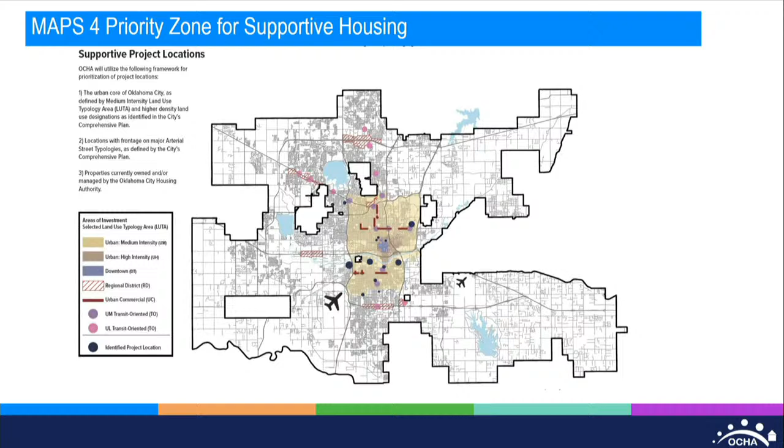And this just shows you right now the current projects: Creston Park, where we're allocating money, Vita Nova, permanent supportive housing project, and then Oak Grove. You can see how we're dispersing the MAPS investments across the community. And I'll keep filling this in as the projects go forward.

And here's a little bit more detail on Vita Nova. There's 75 units there, but it will create more than 75 beds, so more than 75 people will be living there that were previously chronically homeless. So that's why I'm just putting that 85 there, as an estimate.

We did use $3 million of the MAPS funding, as I said before. We expect to leverage back at least $6 million in other sources, and the budget right now is still being fine-tuned, but we're estimating that Phase 1 will be about a $9 million budget, could be $10 million, and that the MAPS funding will represent about 33% of the total development cost of that one first permanent supportive housing project, or about $40,000 a unit on investment.

And we are trying to start the construction before the end of this year. The big news here is that through our RFQ to create a vendor pool, we have selected and engaged Script Architecture. Script and Open Design Collective applied to our vendor pool. They submitted an RFQ, and so we selected them as the architects, and they're engaging Wallace Engineering to be the engineers on the site.

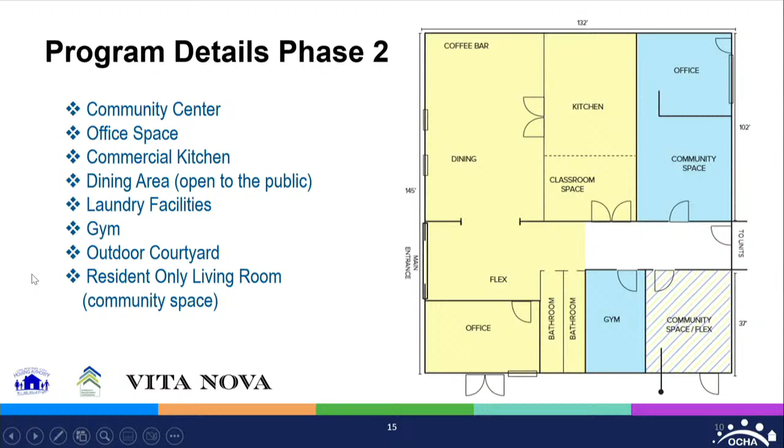Now, some detail on Creston Park. There were previously 159 units, but we intend to come back with about 558 units of mixed income along Martin Luther King between 26th, 27th, 28th, and 29th Streets. Phase 1 will focus on 28th and 29th Streets. We received $1.25 million in GOLT financing, and with our consulting team from Baker Tilly, we're convening the architects and engineering firms, and putting out an RFP for a general contractor in the next week or two for this project to oversee that.

We're going through budget revisions right now because some of the numbers were kind of stale from a couple of years ago, so we're estimating we have about a $2 million gap there right now, and $2.5 million of MAPS for homelessness money will be used in Phase 1 of this project, which will create 170 units. That's just Phase 1, and I'll advise on the other two phases as we keep advancing on this project.

The other place we're investing the money is at Oak Grove Apartments, which is a public housing location right now. We're committing $1 million of MAPS funding there. We're going to use HUD tools called the Rental Assistance Demonstration Program and Section 18 to convert this from public housing to affordable housing. There's 288 units there right now.

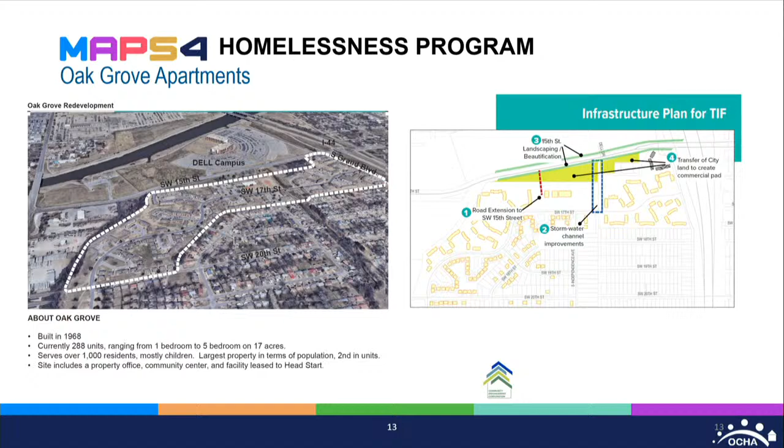And there's over 1,000 residents at this location, just to give you the scale of what we're talking about, and many, many children live at this site. There's also a Head Start facility, which is part of the plan.

So that was just a brief overview, but I'm happy to take any questions about any of it if you have any. Questions? I have a question.

Okay, so at Oak Grove specifically, the plan is that we will be able to help people relocate within the site as it goes through different phases. There are so many buildings there that we'll be able to have a building vacant and move people in, and we pay for all of this. The residents do not pay for any of it, and they're already being advised of the plan as it's in process. We've had resident meetings informing them of their rights and what our plan is, and we will continue to have those meetings. They will be relocated within the site as construction continues, and then they will have the choice to go back to the unit they were in, or they can stay in the unit they're relocated to.

Or then they even have the chance to relocate off-site permanently if they want to. They have the power, and they make the decisions in this, and we're informing them of their rights every step of the way. But we hope that they all stay and that they're the beneficiaries of the new development, and that's what we're informing them.

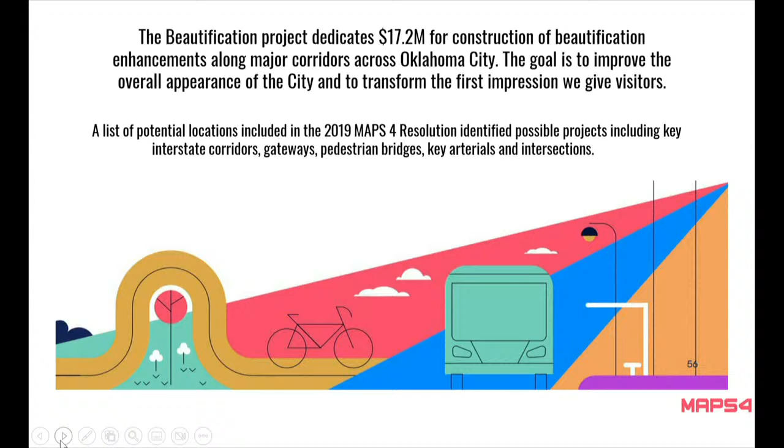The proposed locations follow along with City Council's resolution of the locations for beautification. Item 2 is a corridor type project, and we've chosen 2 locations underneath that corridor for beautification improvements under some highly used bridges.

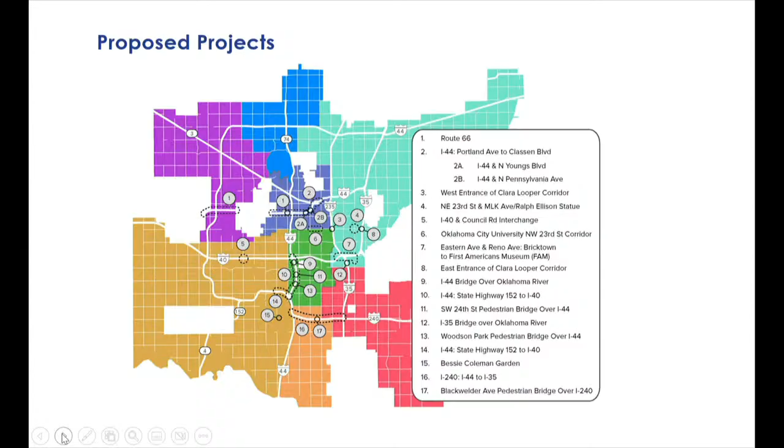So briefly, we started off with an engagement process to go to the public and ask them about beautification across the city. We had a survey that was out there for a couple months. We received 3,500 plus individual responses to that survey. We attended 10 different community events.

We held focus groups. We met with 3 different kinds of groups, and we had 24 different civic organizations involved in those focus groups. We also met with ODOT separately and with planning staff, public works staff, and then obviously MAPS staff to go over all of the engagement and get input from everybody.

Just a brief highlight — we have a much deeper engagement report that we've presented to the subcommittee before, but we did find a few things across the wards in the survey that kind of match for everybody. People want community anchors, they want neighborhood identification, they want to support tourism and economic development, and then they want to bring a sense of playfulness and delight to everyday spaces.

Also, we asked for 3 words from every survey response: what is your vision for Oklahoma City of the future? Walkability, safety, and green, diverse, and inclusive were the top across the board. So we used that to shape how the master plan elements would come together.

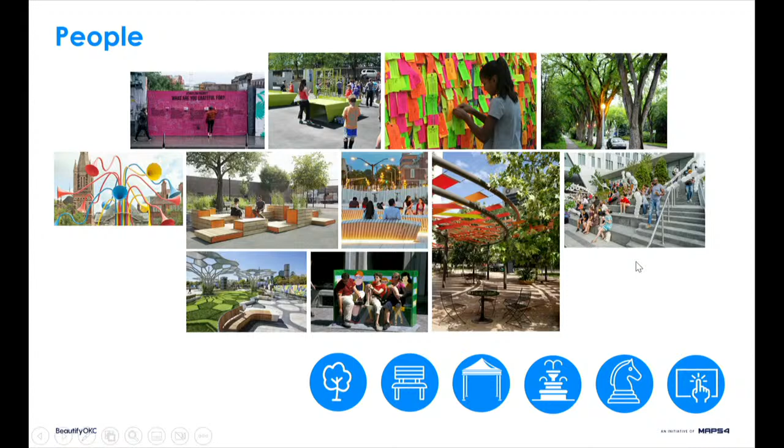So you'll see a lot of different options here, from something that is temporary and playful, to something that's more permanent. And within the master plan, you're also going to see examples of local applications of beautification that we've identified and that were identified in that engagement process, but also showing examples from peer cities or places that might introduce new ideas to Oklahoma City.

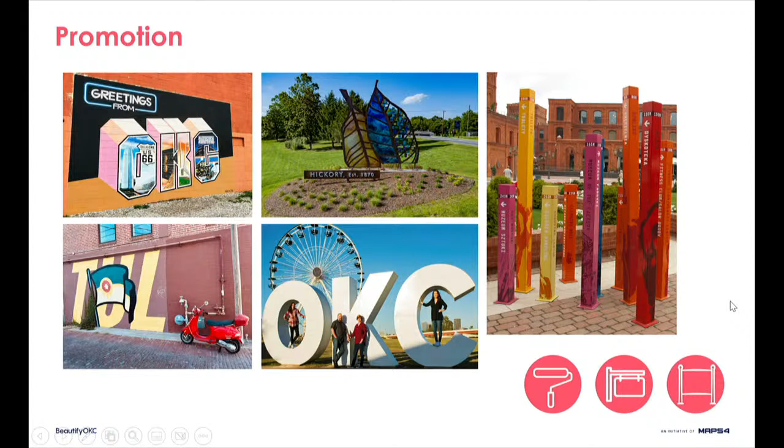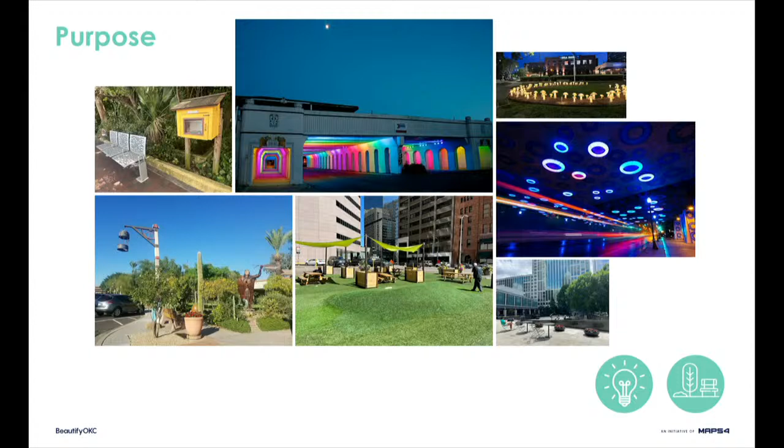So for purpose, looking at this is going to be something that has meaning and actually has intent behind it. So it isn't necessarily just going to be creative lighting. It might be creative lighting with the intent of safety, or seating and shade structure with the intent of providing new space where there might not have been existing community space.

And then sustainable, I think this was a really big one that came out of that engagement, is looking at green infrastructure, but also thinking about that long-term process of maintaining it, and really looking at what materials, what plants, and things like that can be used to make sure that this is maintained but still has a level of ownership and pride from the community.

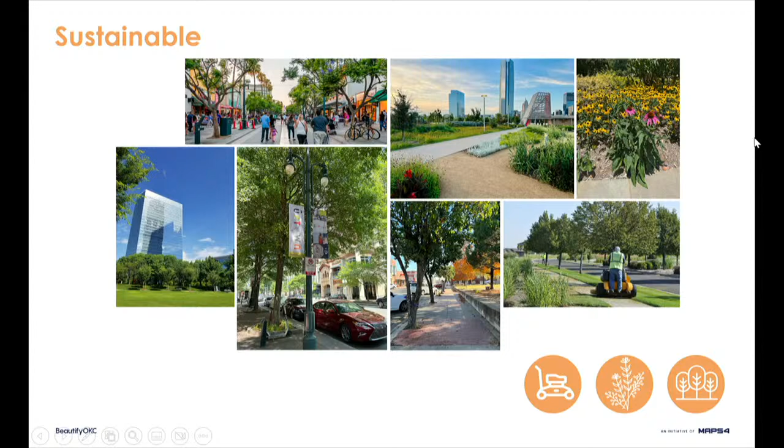And then connections. I think this is an interesting one because it could be interpreted differently. But here we're looking at not necessarily a connection in the sense of building a new trail, but how can we improve upon our pedestrian paths on our existing trails and make those safer and a better experience for the community as well as those visitors.

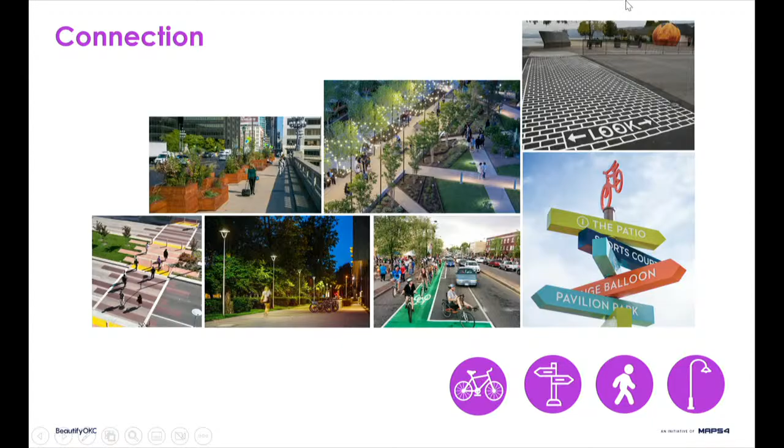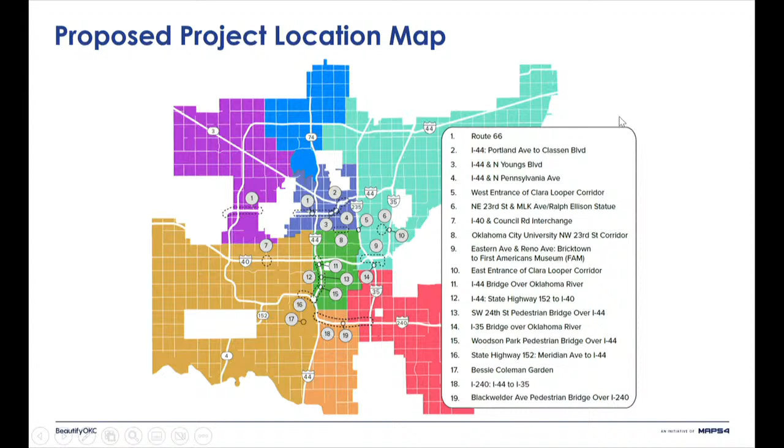So from here, we're going to start going into the proposed projects. So to give you that quick overview map of each of the projects, and then going into the drafted budget that we've produced, you'll see that phase one consisted of the land acquisition, but then also the development of the master plan. And for the budget, we really took into consideration those high, medium, and low applications, trying to find common ground as far as elements and the costs related to them. And so for each of these potential projects, we started to really look at the overall impact and possible applications and materials that would be needed to make sure it is a successful project.

So I'm going to go over quickly some of the projects in phase three. These will be some of the ones that you'll see first. One was the 3 pedestrian bridges that cross over the interstate. I think everyone is probably somewhat familiar with these, probably more so as a gateway that they drive under than a pedestrian trail. But while these aren't necessarily the most attractive pieces of infrastructure in our city, they are really critical and important to the neighborhoods they serve. These are important connections to community assets and public transit, and I think they're deserving of a better treatment, as well as increasing safety, while also giving visitors and those driving on the interstate something visually appealing to see rather than passing under it and hoping your car is going to be okay.

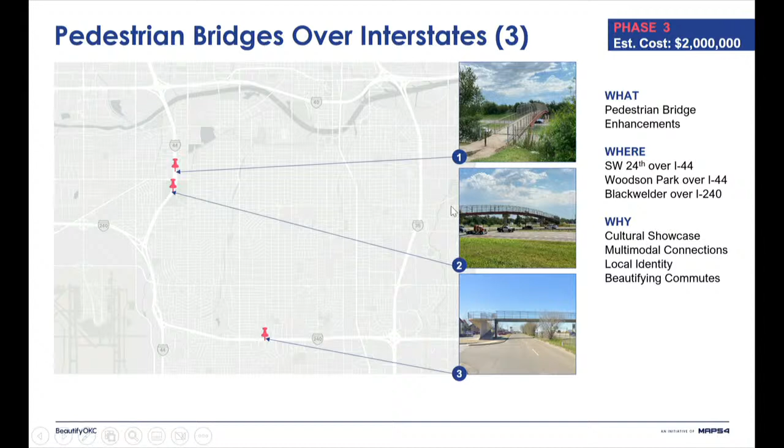All right, so here's pedestrian bridge number 1. Interesting tidbit is that this is very close to the Oak Grove location we just discussed a few minutes ago, so right near Rockwood Elementary. But for each of the projects and how they'll be shown within that master plan document we'll bring before you, you'll see that it's going to show the elements we desire to see within that project. It'll show a case study and certain examples, but we are not ultimately saying this is the piece of art, these are the trees, this is exactly where this needs to go. We are setting a precedent and identifying the stakeholders and parties that will be involved in that next phase of design. So we're providing imagery, examples, and ideas that will help set up the MAPS office for those RFQs and RFPs in order to make sure they have a clear process for moving forward and soliciting those designs.

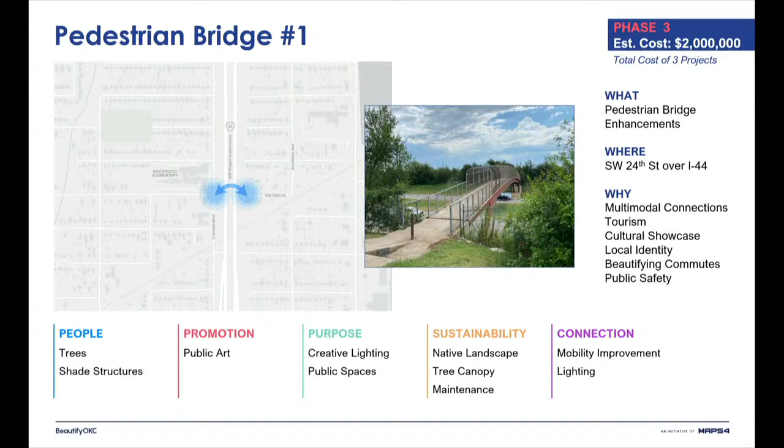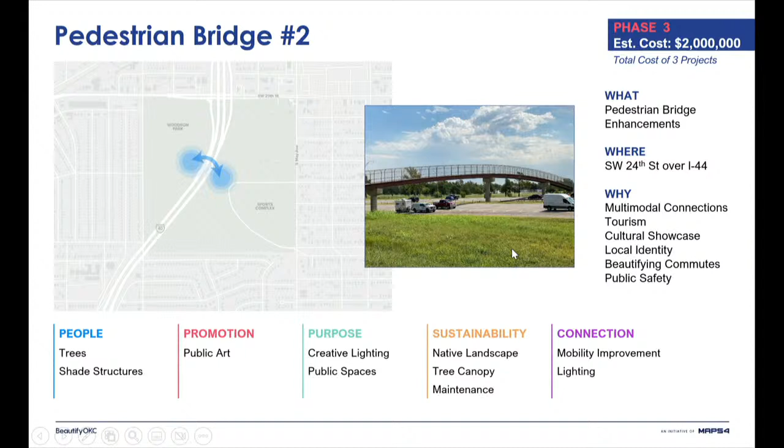So then pedestrian bridge number 2, you can see very similarly, there might be slightly different elements suggested in each location dependent on the context. But for each of these pedestrian bridges, they're going to be pretty similar because they're designed similarly. And then here's that third one. And to give one more overview of those examples, showing here that high, medium, and low application of beautification. This top right one is just yarn, so it's what we call yarn bombing. It's a common practice that allows artists to come and create a textile experience.

It is a lot more temporary, but this bottom left is actually plastic pieces adhered to an existing fence—slightly more permanent, but also a very cost-effective application to existing infrastructure. This final one includes some green infrastructure, requiring more updating and more cost. But those are things we want to provide as examples in the master plan, to provide ideas without limiting how this project will actually be implemented.

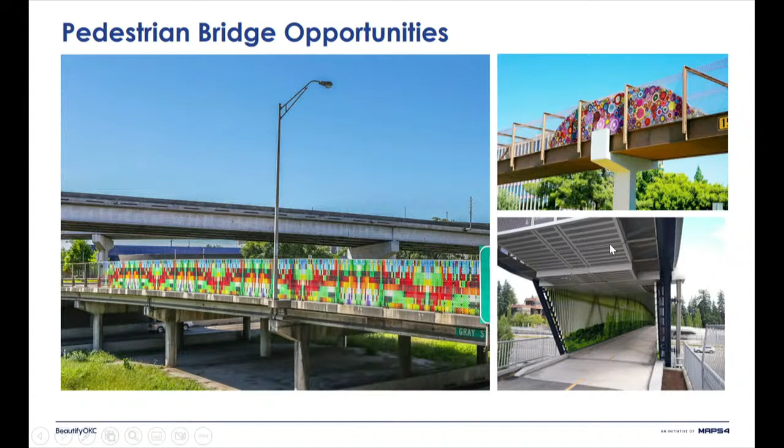Another one we're looking at is the Reno corridor, which is going to be a really important corridor in the next few years. An interesting thing here is that it's going to be essentially a gateway, but also currently connects some existing assets—we have Bricktown, and now the FAM. Knowing that in coming years with the Olympic trials potentially, that's going to be an exit a lot of people will be taking, it's an awesome opportunity to think about how we're welcoming people into that area.

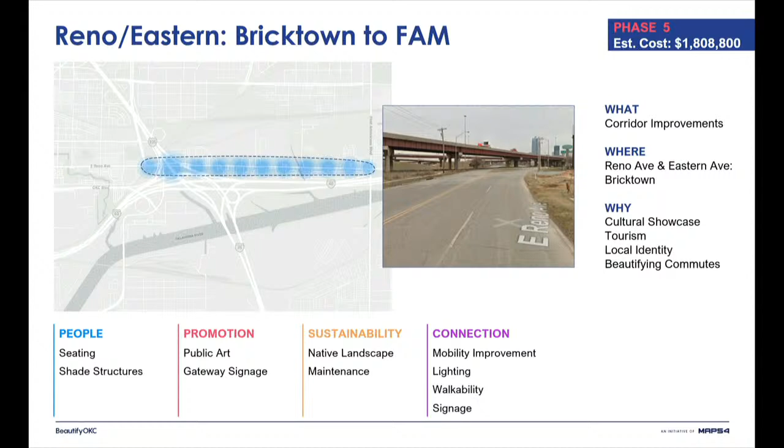This is one too where we've talked with ODOT, because a lot of this is ODOT right of way. We've set a precedent with them about the things we want to see in certain areas and within their right of way, setting up the relationship so that in design phases they won't be blindsided by what's put in front of them. It's something they expect and are willing to work with us on—a relationship we really worked on within this plan. You can see here opportunities for this corridor, with high, medium, and low applications.

One is a more costly art installation that incorporates light, improving safety for pedestrians but also providing a landmark—something visually stimulating. Bottom right corner is cast painted concrete; the materials are a little lower cost, but when paired with other elements it can still make a pretty impactful statement. This top right one is a low cost application—paint and lights. It doesn't take much, but ultimately we want to inspire these projects to include people and residents, and think about how they meet all of those principles.

We've also provided maps with something they can internally use to make sure those projects are meeting residents' expectations.

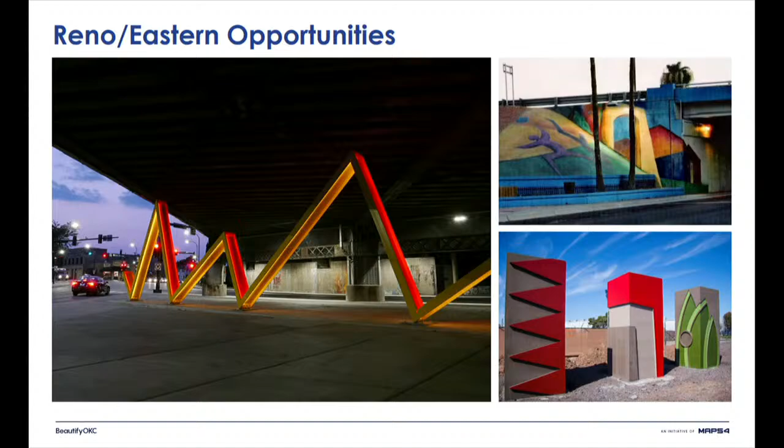Hello, thank you for your presentation. I'm really excited to see all of this—it's kind of in the brain space that I live in. We've got an Uptown 23rd Streetscape coming down the way, so seeing these visual inspirations is really awesome.

Thank you. You mentioned earlier about peer cities—are there any specific peer cities you've looked at that you've pulled these ideas from that you'd like to share with us?

I think one included in there—maybe this is coming to mind because I put it in—is Cincinnati, a common one that gets brought up. It's really interesting; they've done a great job using their historic districts to catapult urban development, improving some less desired areas in tactful, low-cost ways. Another one is the Indianapolis Cultural Trail, looking at how beautification along a bike trail can actually improve economic development of a distressed area. There's a lot more, but those are the two I can think of.

I would add that Oklahoma City, because we're becoming such a destination for public art, is actually using our own examples now. And to borrow from Spinal Tap, we're taking it to 11 on how much public art we might want and how much more opportunity there is.

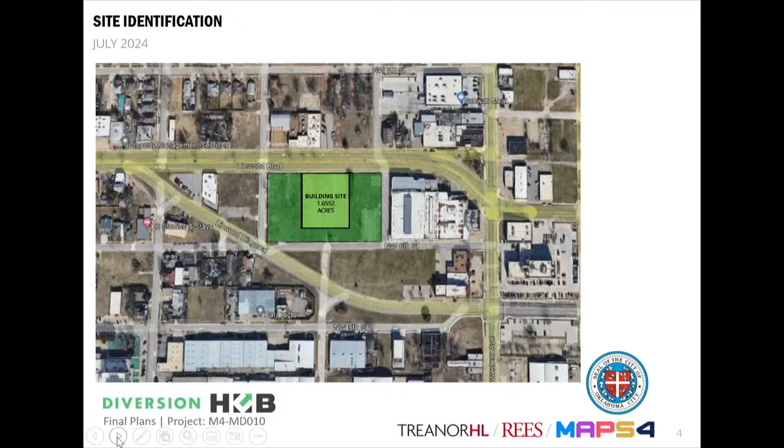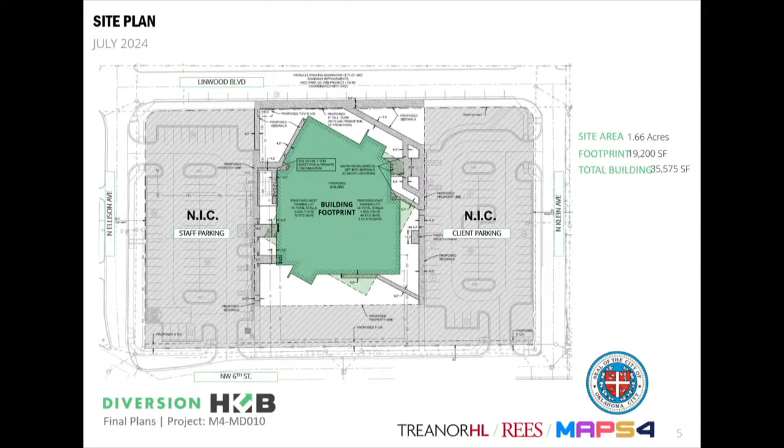So a little closer in here on the site plan, you can see the building footprint, and the white area around it is the immediate site area that will be a part of the MAPS 4 diversion project. So all the sidewalks and connections directly off the building are encompassed in that. And then, as I said before, you kind of see the U-shaped site around there, which includes the parking lot and some additional sidewalks and access to the site. That will be part of the project, but it will be funded by Diversion Hub and Arnall Community Funds rather than the MAPS funding, so it is just designated in that way on the plans.

And then we have a couple of the floor plans here today, and again, for the previous board members, the program spaces, the floor plan spaces have not changed. We're still providing a large welcoming lobby, which was very important to the Diversion Hub. The central spine core area there is for client meetings and some small training spaces. We also have some behavioral health spaces situated directly off of the client spaces. There are some alternative court spaces located on the ground floor, some larger training spaces which can be utilized by Diversion Hub or their partner resources for continued training and education. And the west side of the building has some of their donation, storage, and collection spaces, as well as a small laundry space. But I think the takeaway is this ground floor is all client-focused spaces.

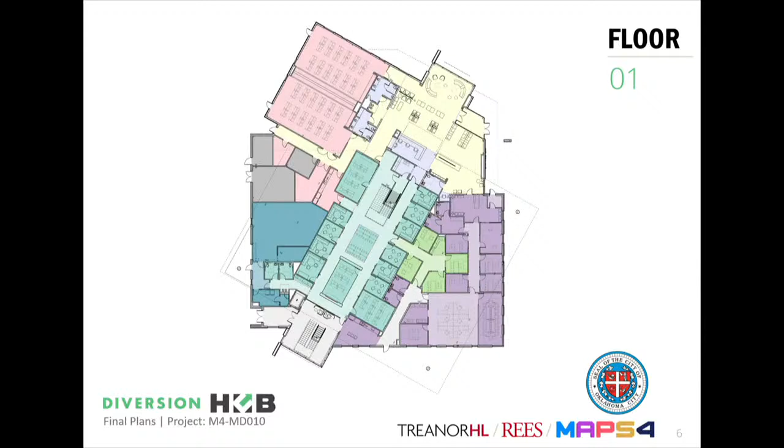And the second floor is the supporting staff and administration spaces. So we have offices, we have break rooms, and some additional conference rooms that will be dedicated for the staff and the partners to use.

One thing to note here is the angled spine in the building, and there is an open connecting stair. Diversion Hub acknowledged the need to separate some of the staff from the client spaces, but they want a strong connection to all of the client spaces. So it is an open stair. It is secure, but visually open to allow more connection with the client spaces downstairs, to see how busy it is and the activity, and to help keep a stronger connection between the staff and client spaces.

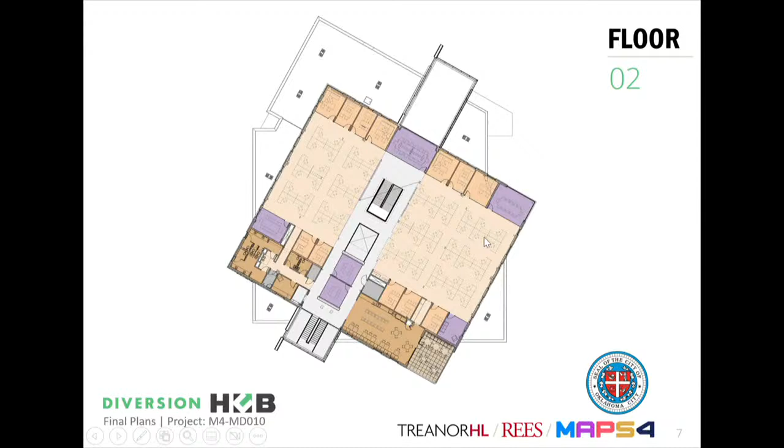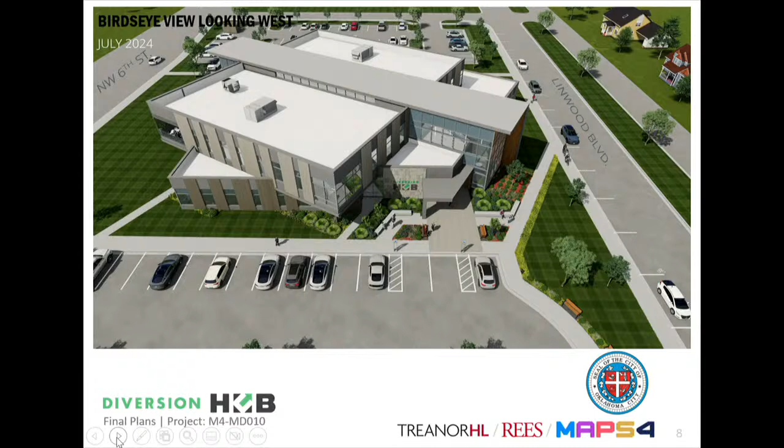For final steps, we have issued the construction documents and the project manual specifications to MAPS. We are going through the approval process with the public entities. The goal is for the documents to be put out to bid next week after the city council meeting. Behind the scenes, we are conducting furniture coordination with the diversion hub. That portion will not be funded by MAPS funding, but it's a piece we're working on. The public art piece is another item we've been working through, and my understanding is the artists have been selected for that.

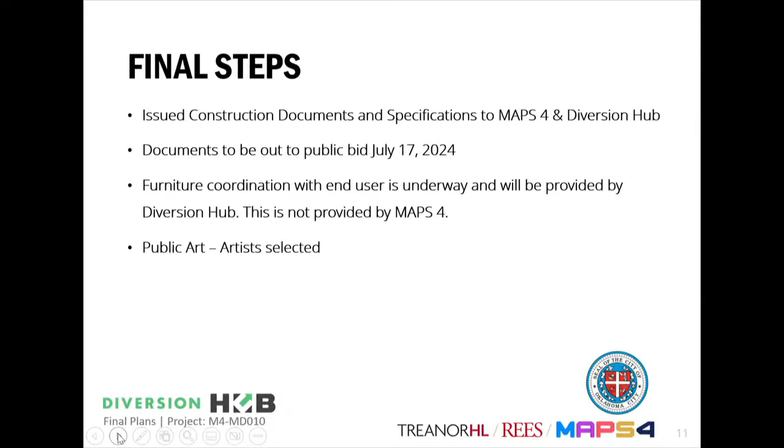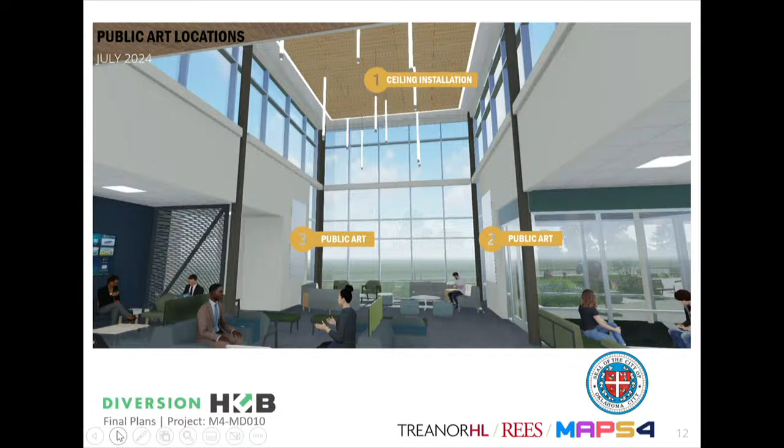Just a few interior views here: an interior view of the main lobby, and we've highlighted the location. There will be some public art located on the walls of the lobby space, and there'll be an art ceiling element in the lobby as well. One of the things Diversion Hub also wanted to prioritize was making sure it was a welcoming and comfortable space for their clients, so we worked to really open up this space and provide a lot of natural light.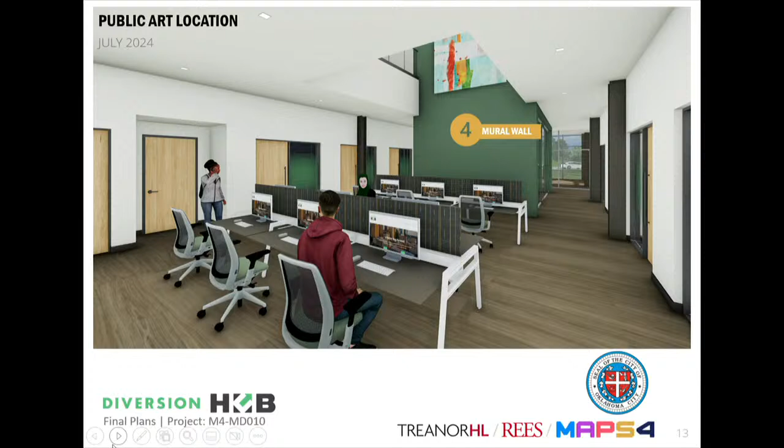As far as next steps go, we are hoping for approval today and working towards approval with City Council next week. The plans go out to bid next week. We would be conducting a pre-bid meeting in July, towards the end of July. We would be collecting bids early in August, with the intent to select and award the contract to a contractor in August and get construction underway in September of this year.

As far as the budget goes, the $13,023,400 listed is the MAPS portion dedicated for construction. There was also $1 million allocated for land acquisition. The land was acquired through Diversion Hub and the Arnall Community Funds, so that $1 million has now been put into our construction budget to use. So you see the total there.

That's $14,023,400. We received updated cost estimates as far as splitting the building and site piece, so our current construction estimate is coming in at $13,947,000 and some change. MAPS has also sent some funds to OG&E to start some utility relocations on the site, so that's accounted for there as well.

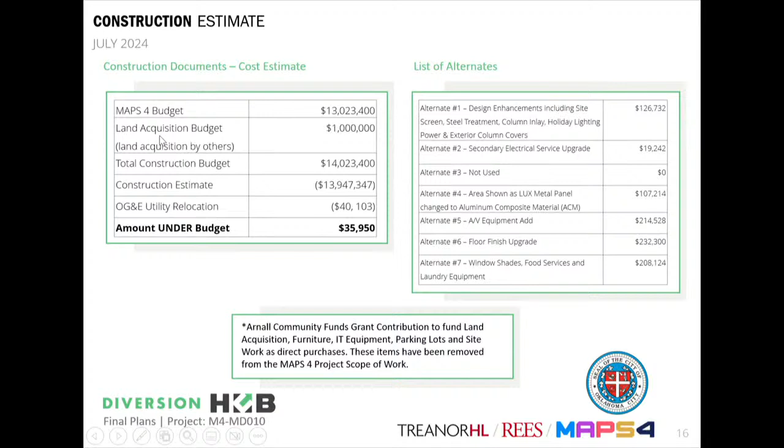Okay, that is the end of the presentation. Thank you so much. Any questions? This looks great, ready to get rolling. Yeah, we're excited. Nothing? None? Okay, thank you so much.

So we need a motion and a second to approve the final plans and specs. Please cast your votes. Okay, the motion passes. Thank you.

David, do you want to, for these next three items, explain kind of what all of these three do, and then we can just knock them out?

Okay, I can. So the next items are related to the diversion hub. Item H is the lease and management agreement. This is typical, like we did for the wellness centers with MAPS 3. Anytime we have an operator, we have an agreement like this, and it sets out how we will repair certain things, and they're responsible for day-to-day items and all of that. It's basically a lease agreement.

Then item I is the real estate donation agreement. So the diversion hub of Oklahoma County is donating that land immediately around the building. If you saw on that site plan, you saw NIC, not in contract. They are keeping the parking lot areas.

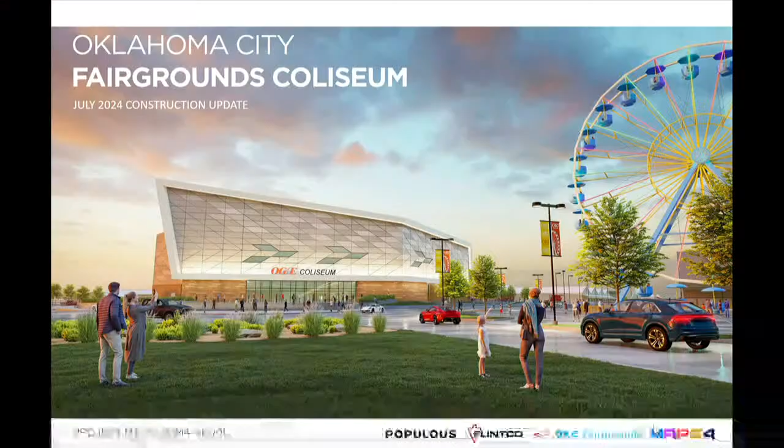Good morning, Madam Chairwoman and board members. Pleasure to be here. As David mentioned, it is a very good change order. We continue a stream of those. I wanted to really quickly give you an update on our project construction status out at Fair Park. We are moving along really rapidly now that we've had some good dry weather. We did have quite a bit of rain back in April and May.

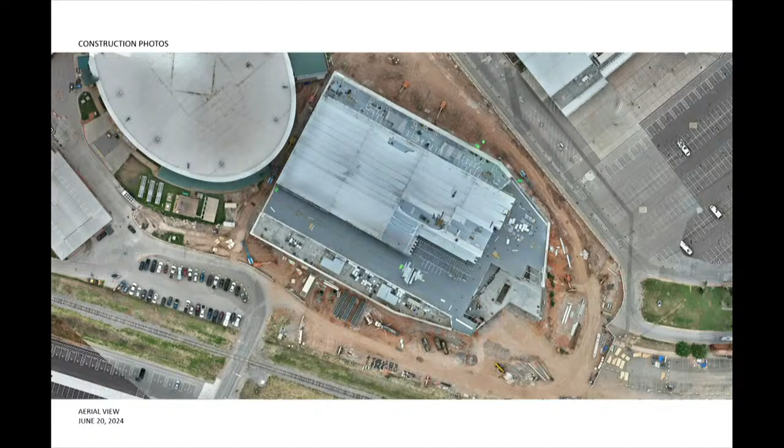Most of the roofing is now complete. We are looking at it from Gordon Cooper, and this is from driving in from May Avenue.

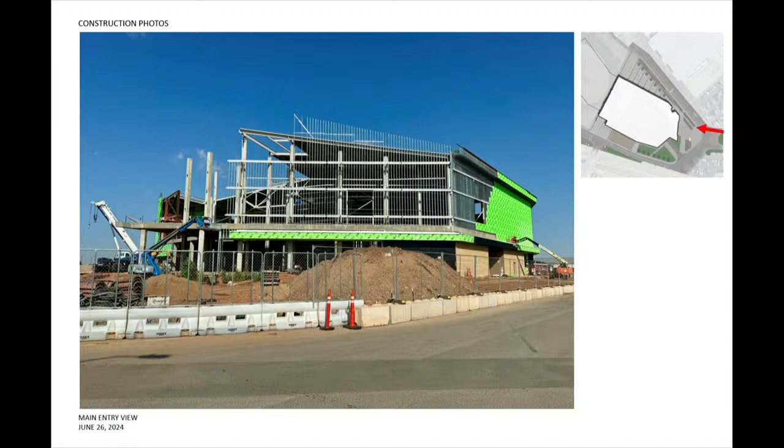We are about to begin the completion of all the major exterior steel work. We'll close in the walkout area where we've backed out our construction equipment, close in the front, finish the roof, and begin drying in the remainder of the building by the middle of August.

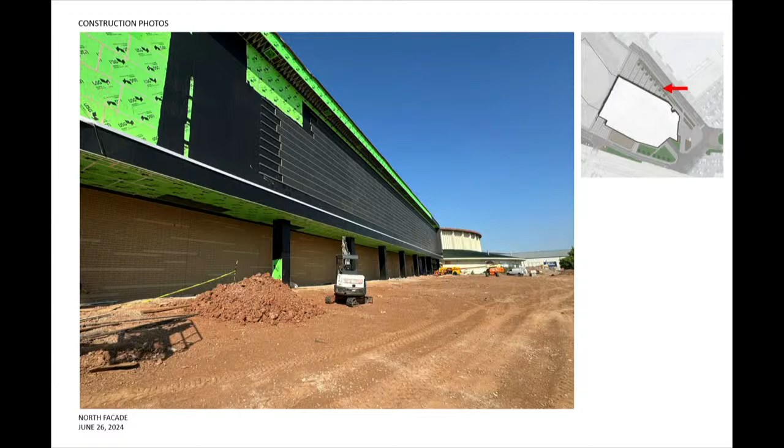This is along Gordon Cooper. You can see some of the exterior waterproofing and insulation in final installation. As we go around the building towards the view from I-44, you can see our phenolic panels, that exterior weather barrier rain screen going up.

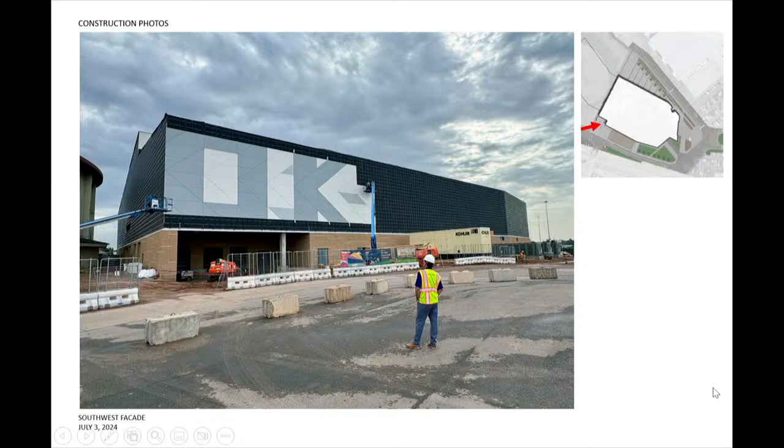On this side, it's going to have a giant OKC that you can see all the way from the highway. Flintco is moving along really rapidly on the exterior envelope, and we anticipate that by mid-August the building will be dried in and we'll be primarily working on the interior.

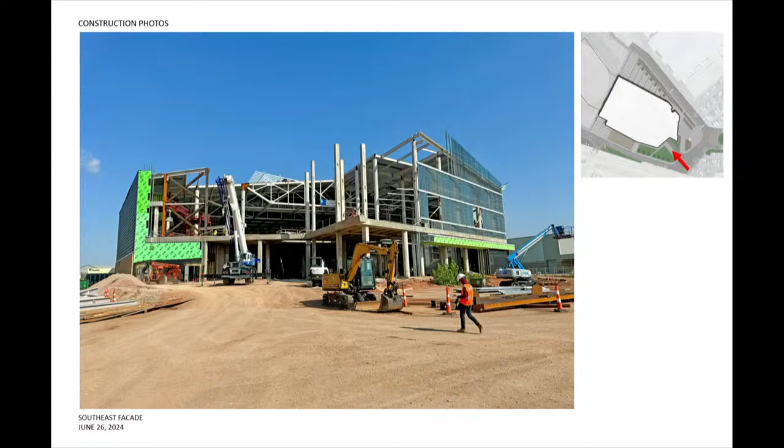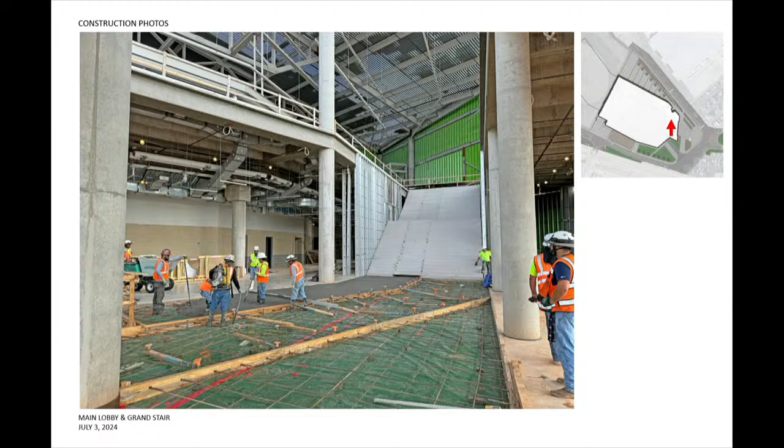That shot is from the front entry where we're going to finish the steel work over the next couple of weeks. We were out on July 3rd when they were completing the last couple of interior slab pours, so almost all the interior floors, or at least the bases, are in. They'll begin working on their more detailed finishes once we get dried in.

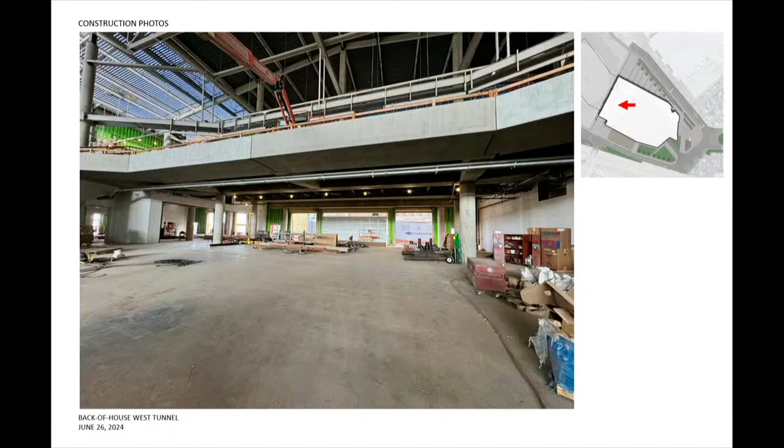Some of these areas are really remarkable, huge areas that enable our building to do things others just can't do, and underneath the opposite seating bowl where we're going to have animal return lanes and circulation. The upper concourse area has the grand stair that you can see below.

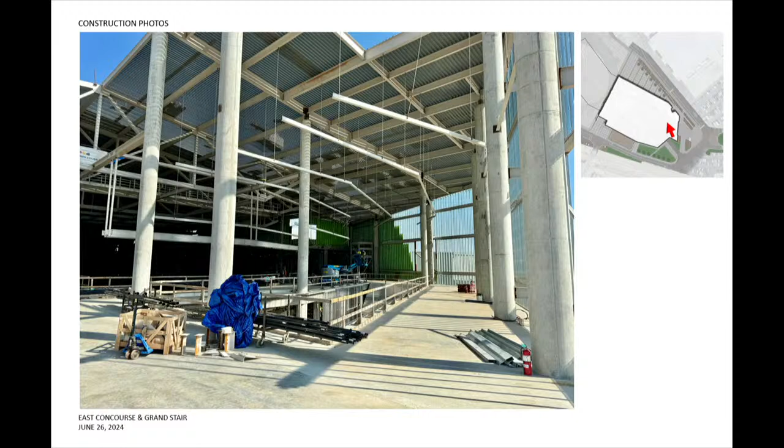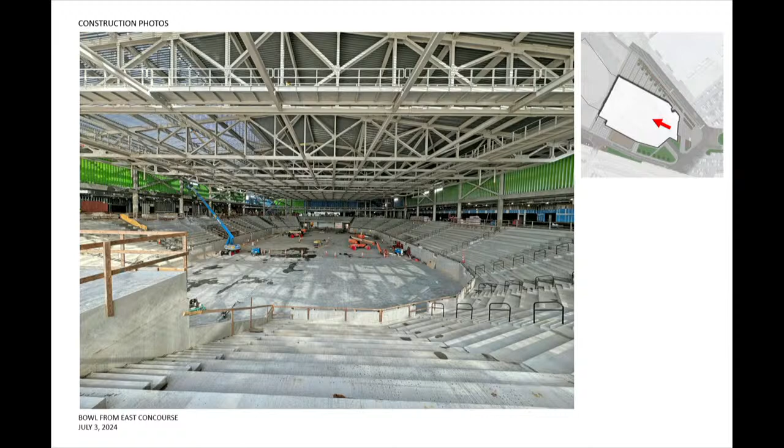They're starting to get supporting infrastructure in for some of our wood ceilings and feature areas in that concourse. The bowl, when we were out there last week, they had completed almost all of the interior railing, so they're sailing along really quickly. They're beginning to do wall framing, drywall and tile, and finishes will start going in over the next few weeks.

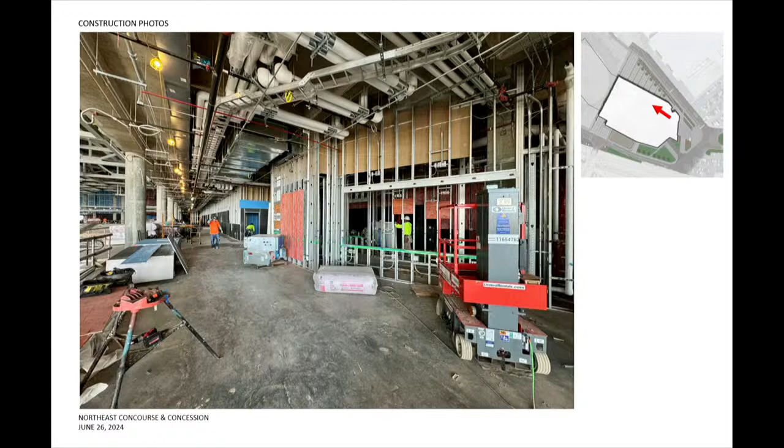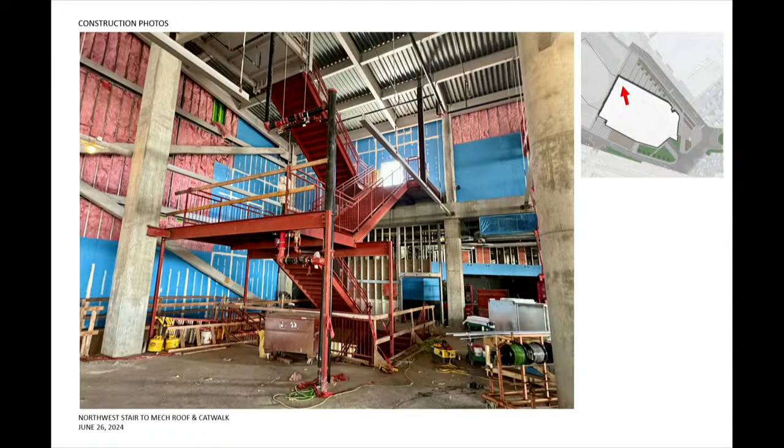Another aspect we've been able to add into this building is really ease of maintenance. This building has stairways all the way up to the mechanical mezzanines and to exterior signage areas, so maintenance will be really easy in this building.

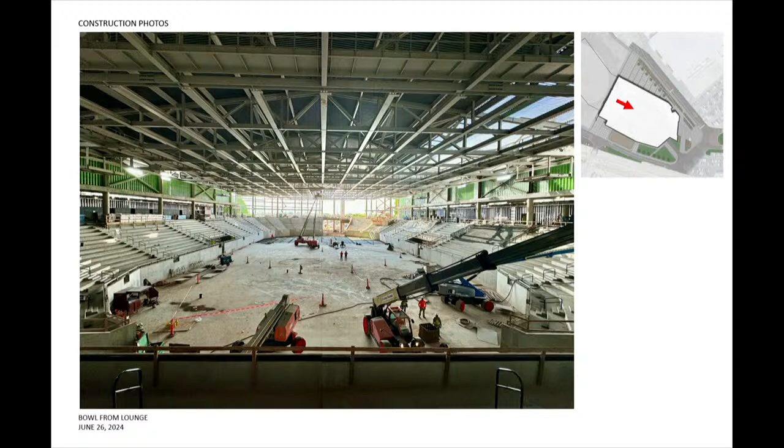From the opposite end, the north end, looking down through that bowl, they're working on finishing some of the catwalk and spotlight bays. So the building is moving along really quickly. If you have a chance to drive through, take a look, please do, because it will be dried in before you know it.

I want to run through a few of these items on the change order. Most of them are very small, but nevertheless, I'll run through them.

Item number 1 is discontinued ticket window displays. These go in the ticket windows just above so people can tell if they're open or closed. There was a manufacturer change, and the new, updated product is a tiny bit more expensive, about $5,000.

Light pole access - these are the light poles along Gordon Cooper. We purchase and install the light poles to match the design of the rest of the campus. However, they are serviced by OG&E, which requires handholes, so we had to add that.

About 18,000 for some stormwater sewer inlet modifications. That site has a myriad of underground utilities all through it over generations of construction, and we occasionally run into conflicts.

There's a minor conflict where we need to modify some sewer infrastructure to bypass existing utilities - about 10,000. Mechanical yard fence: we have the same condition on the backside of the building, where we had fence supported by piers. However, in two areas those piers conflict with some utilities we found, so instead of reworking the utilities, we're going to put in a grade beam and protect those utilities. That's a minor change of about 20,000.

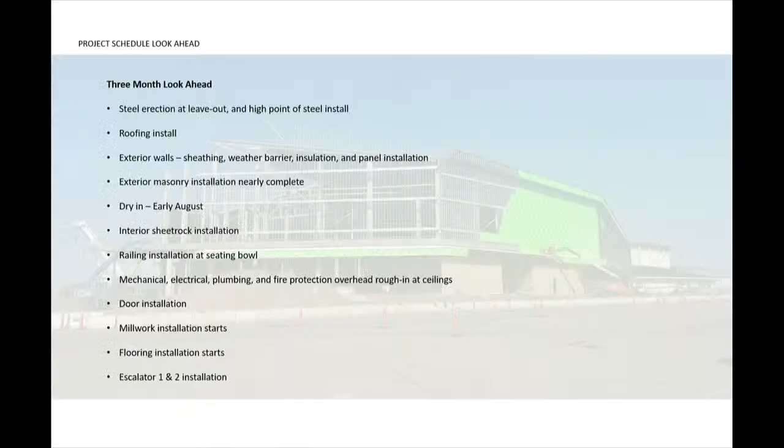Real quick look ahead, I did mention some of this. We're going to be completing that steel and roof installation very quickly in the next 2 to 3 weeks. The exterior walls will be done in about a month, so we'll be dried in early to mid-August.

We'll be very aggressively after all the interior finishes at that point. The sheetrock, tile, painting, the mechanical, electrical, plumbing systems are well underway already. All of the doors, and we'll begin, once we have a conditioned space, to start putting in millwork and final flooring.

Escalator 1 and 2 will be happening very quickly. They actually already have one of those escalators positioned in the building, so we're going to start seeing significant interior infrastructure going in place very rapidly, and I think the building will start to take shape on the interior very quickly this fall.

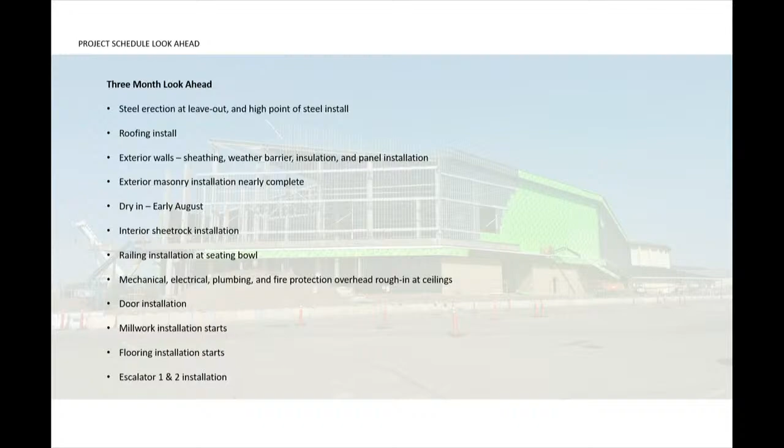So maybe due for a tour relatively quickly. We're happy to accommodate should Mr. Todd want to do that.

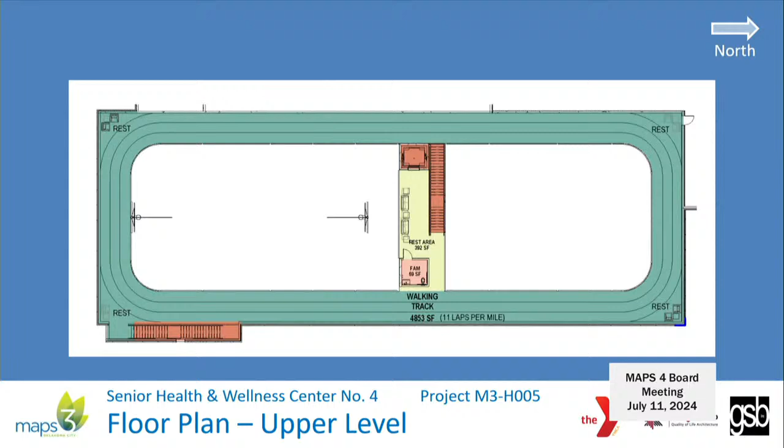On the change order, we are adding a sprinkler zone, adding some safety painting that the inspector wanted us to have, some plumbing corrections, relocating some shower controls for better ADA access, and modifying some electrical circuits, and buying some pool equipment for exercise. Total of $43,061.

And there's a note there that we are offsetting part of that change order. Through 17 change orders, we are at $43,061 on this one. Original budget was $13,946,000ish. We are currently going to be, with this change order, $14,497,687, and adding 25 days for the contractor to do the work.